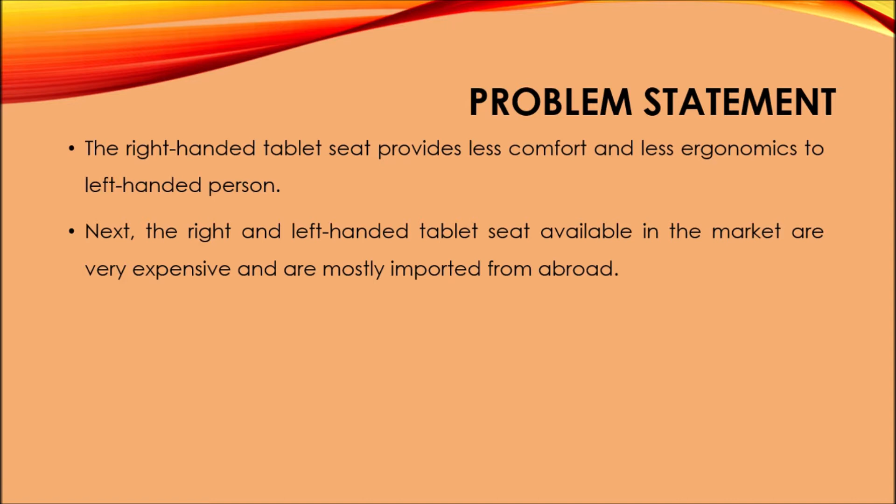Problem statement: the right-handed tablet seat provides less comfort and less ergonomics to the left-handed person. Also, right and left-handed tablet seats available in the market are very expensive because they need to be imported from outside the country. The objective: to produce a tablet armchair that is easily portable, and to fabricate a tablet armchair that enables both left-handed and right-handed persons to use it.

The scope of the project: the focus of the study is to improve the ergonomics of the chair user by producing a both-handed tablet armchair that is comfortable to use, to enable both left-handed and right-handed persons to use the chair, and lastly, to produce a foldable chair that is easy to carry.

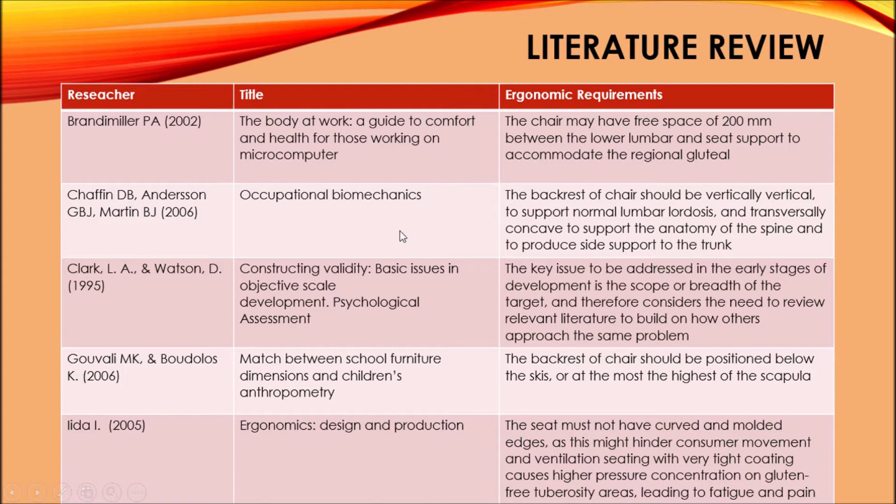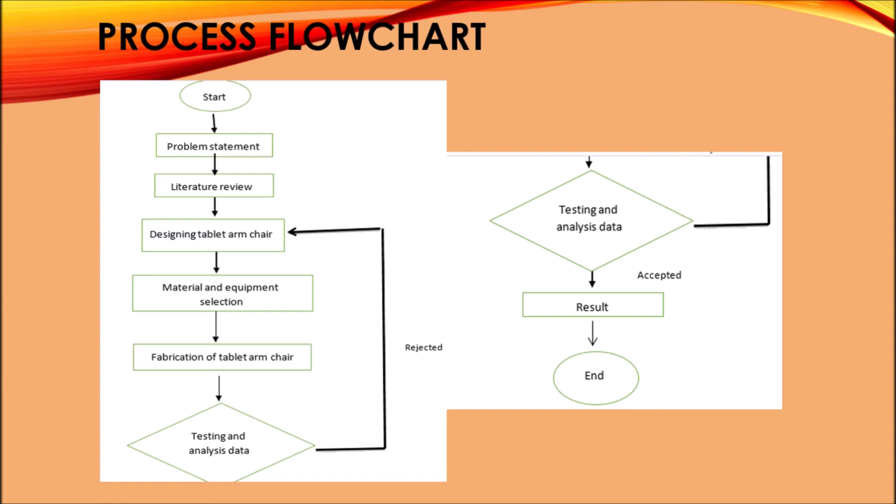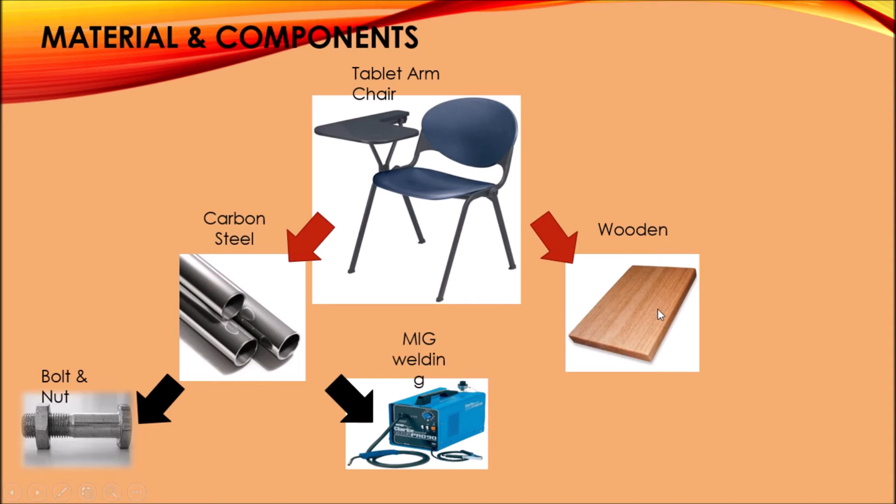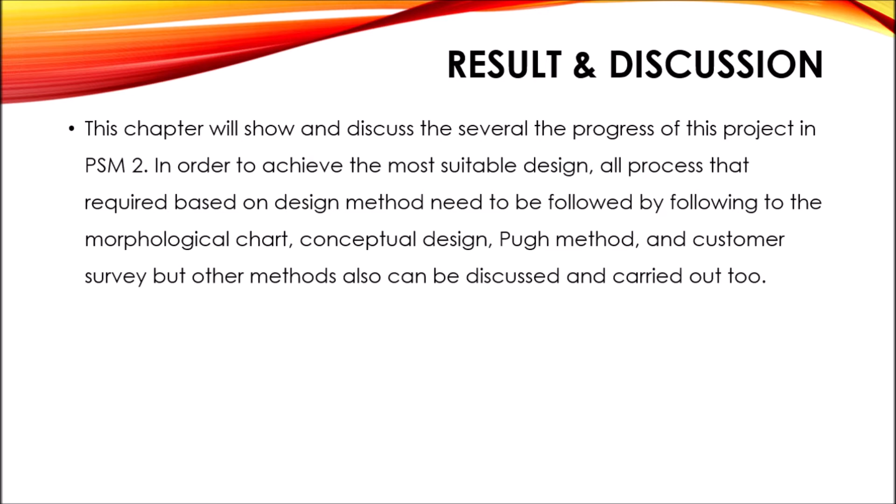We proceed to chapter 4, result and discussion. This chapter will show and discuss the progress of this project in PSM2 in order to achieve the most suitable design or process required, based on the design methods followed, such as the morphological chart, conceptual design, Pugh method, and customer survey. But other methods can also be discussed and carried out.

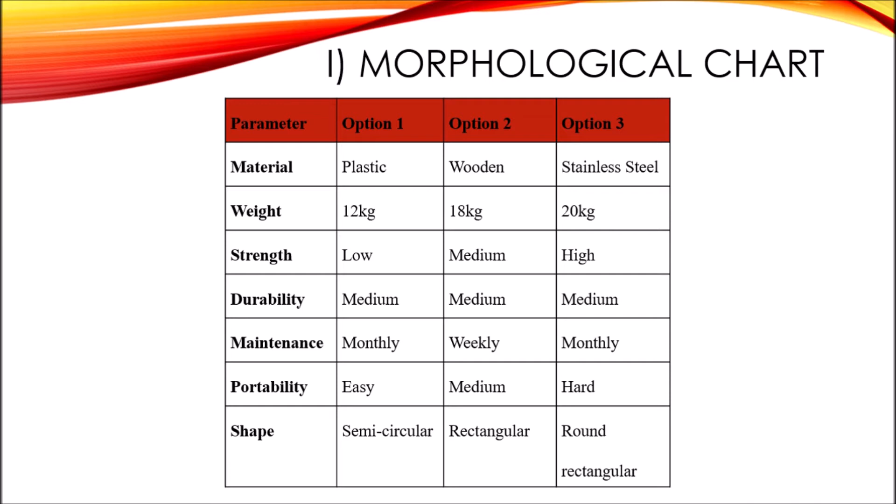Okay, for this morphological chart method, we choose stainless steel because it has high strength, is more durable, and can withstand heavy force.

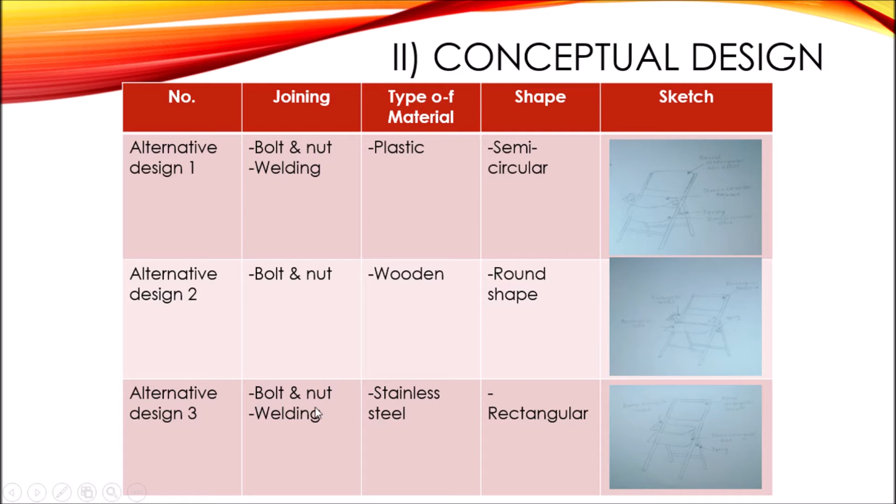Conceptual design: there are three alternative designs. Alternative one, plastic, we use joining by bolt and nut and also welding. For alternative two, the wooden material, we join it using bolt and nut. For alternative design three, we join it using bolt and nut and welding.

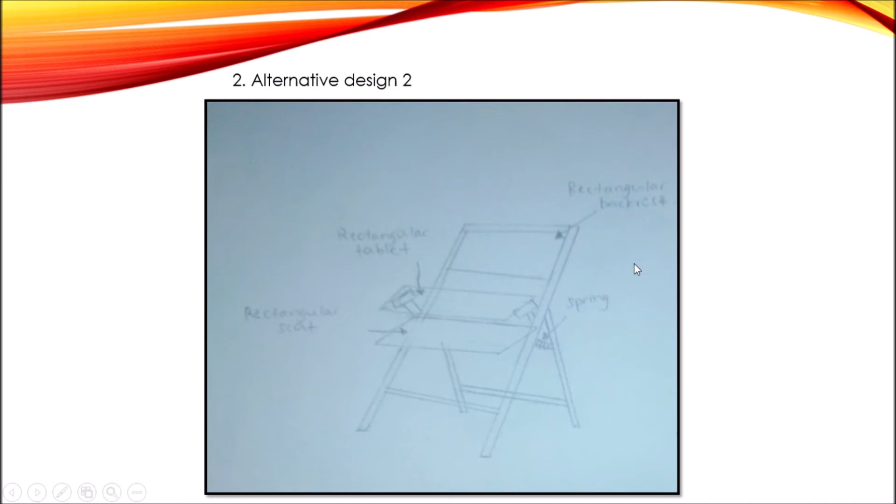This is alternative one, which is the plastic material. Alternative design two, which is the wooden material. Alternative design three, which is the stainless steel material.

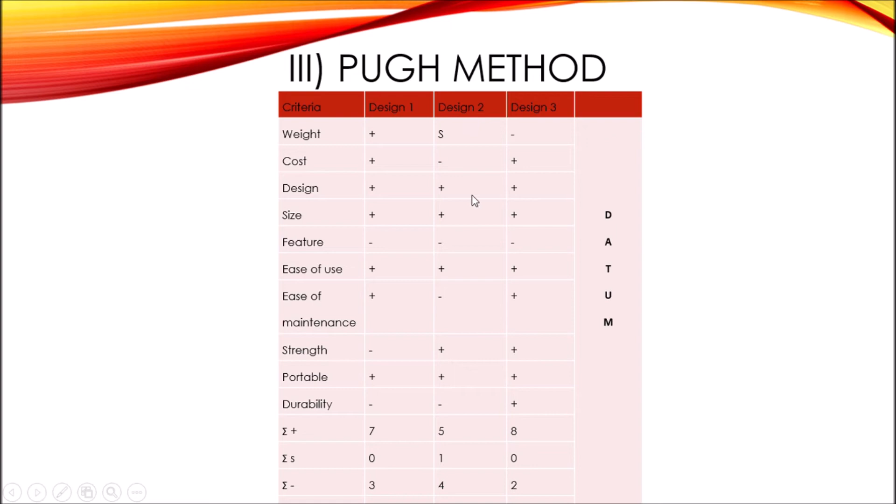Okay, we proceed to the PUGH method. As you can see, this is the result we get for the PUGH method.

Customer survey is a set of questionnaires to gather information about the both-handed tablet armchair product. The importance of the survey is to determine issues faced by customers about the design of the product and potential solutions for the issue.

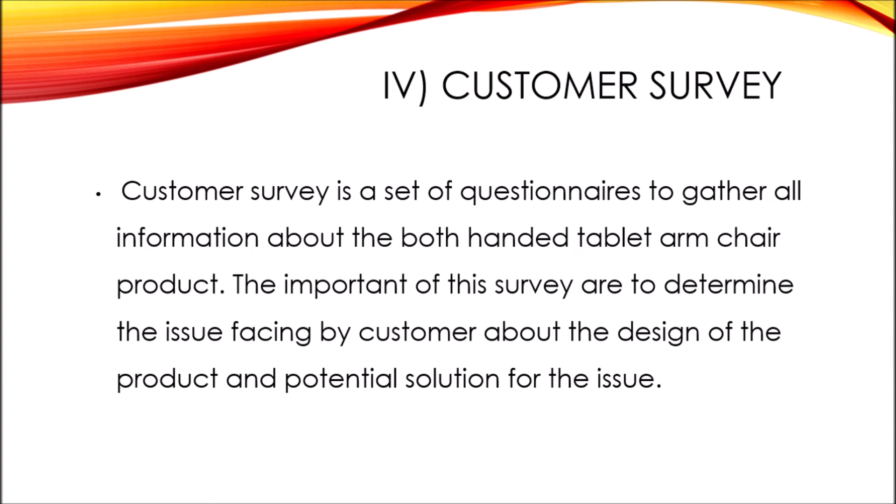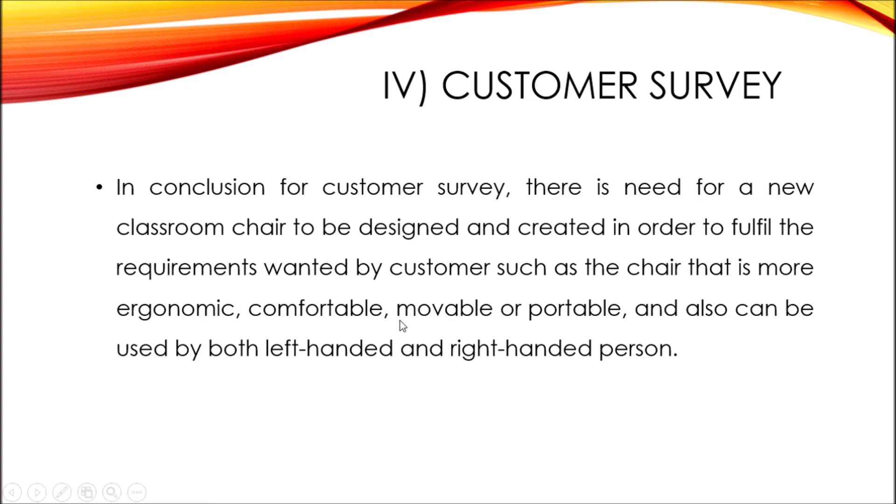In conclusion, for the customer survey, there is a need for a new classroom chair to be designed and created in order to fulfill the requirements wanted by customers, such as a chair that is more ergonomic, comfortable, movable or portable, and also can be used by both left-handed and right-handed persons.

The stress analysis simulation is created to determine the ability and strength of the both-handed tablet armchair to undergo a force of 1200 Newton, or 120 kilogram, on the chair seat, and 200 Newton, or 20 kilogram, on the tablet arm.

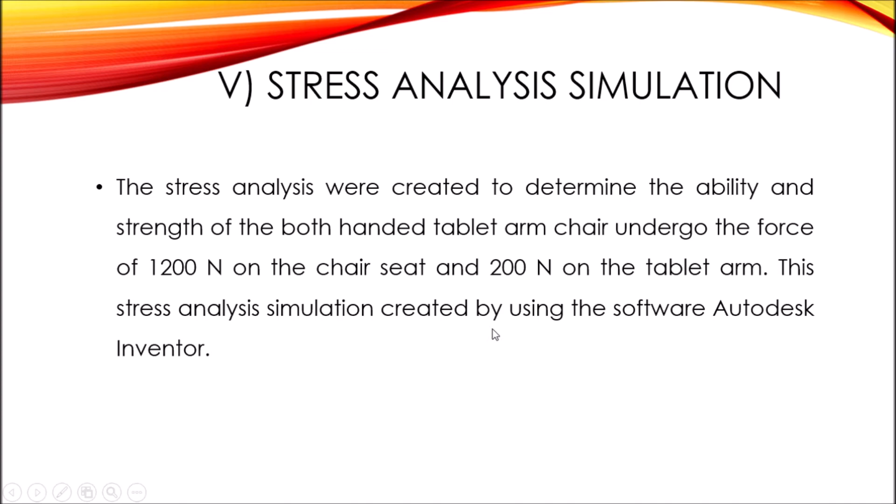This stress analysis simulation was created using the software Autodesk Inventor. So this is the material properties for the stainless steel material and the material properties for the wooden material.

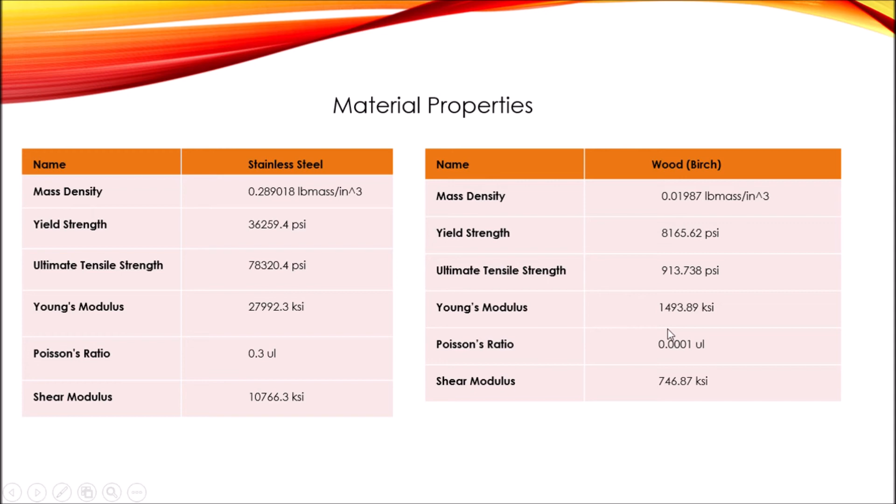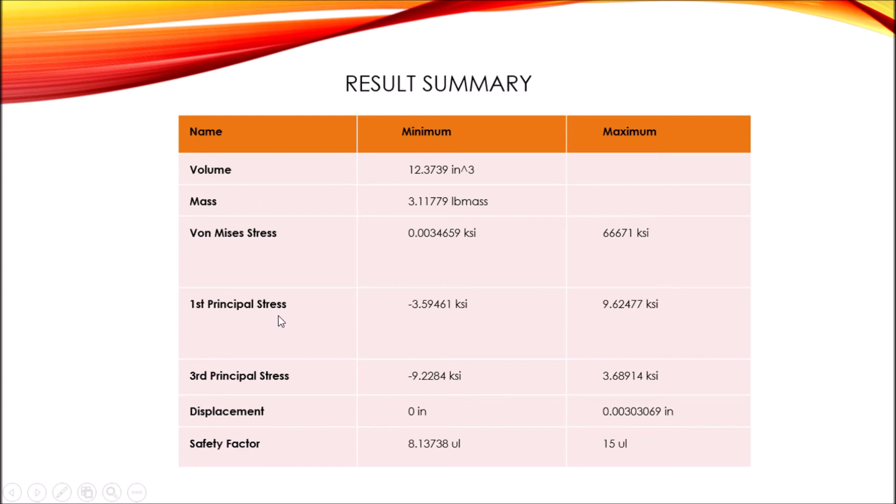So we get the result summary. The result for this analysis is based on von Mises stress, first principal stress, third principal stress, displacement, and safety factor. First is the von Mises stress.

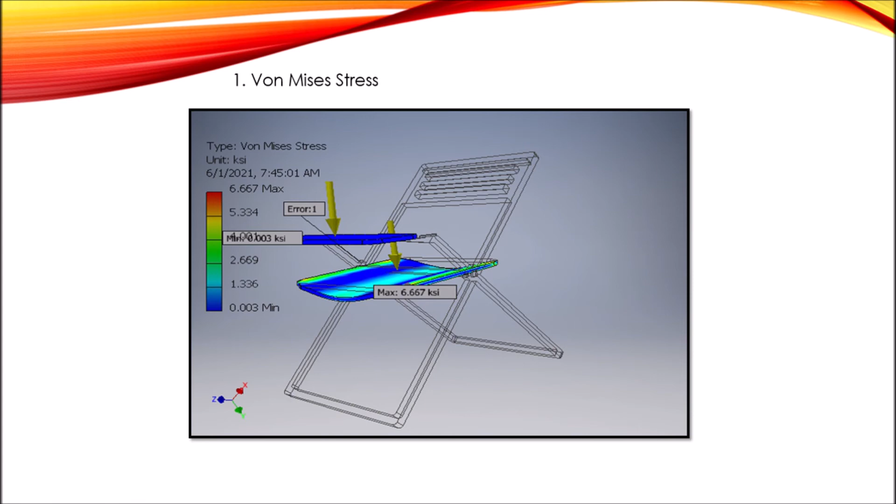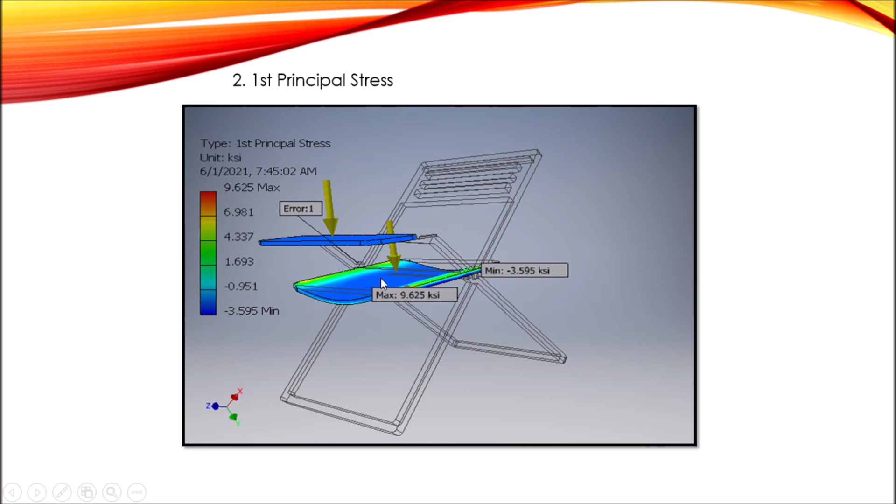First principal stress is used to understand the maximum tensile stress acting on the material. It's looking good because we can see the blue and green color. So the blue and green color means it's looking good.

Third principal stress is used to understand the maximum compressive stress acting on the material. We can see that overall the color is green and blue, so it means good.

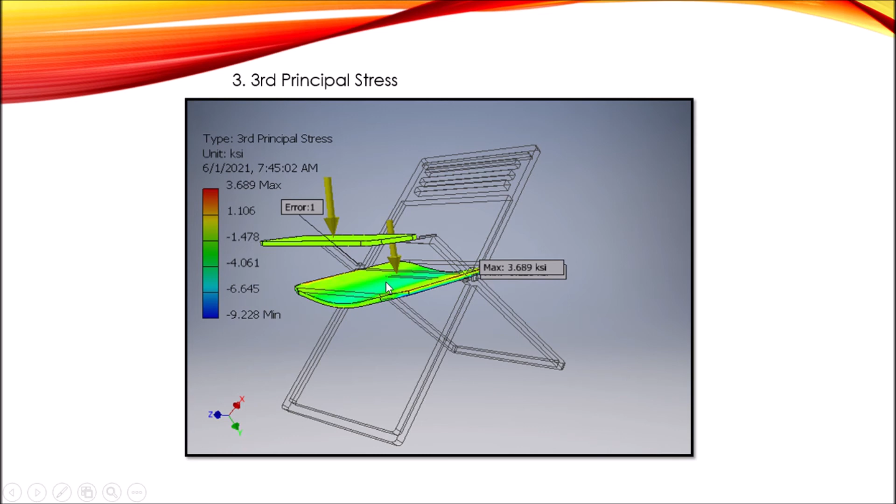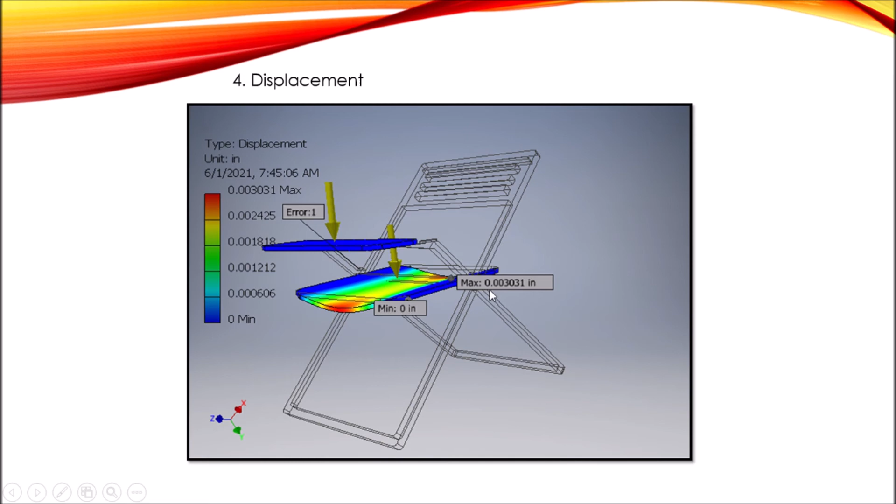Displacement is defined as when a force acts on the material, the material will move by some amount, measured in inches. We can see that the minimum the material will move is 0, and the maximum is 0.003031 inch only.

The safety factor is used to determine whether the material is safe or not. We can see that overall the color is blue, so yes, it is safe to use.

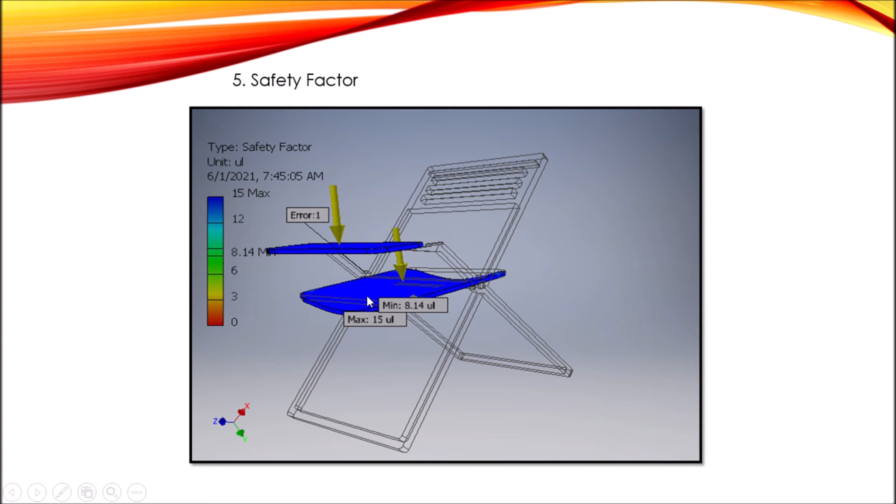Discussion: the chapter carries on with its methods used for the product development. The important design methods are morphological chart, conceptual design, Pugh method, and customer survey, methods functioning to ensure all the choices of the product meet the expectation and objective in a specific way.

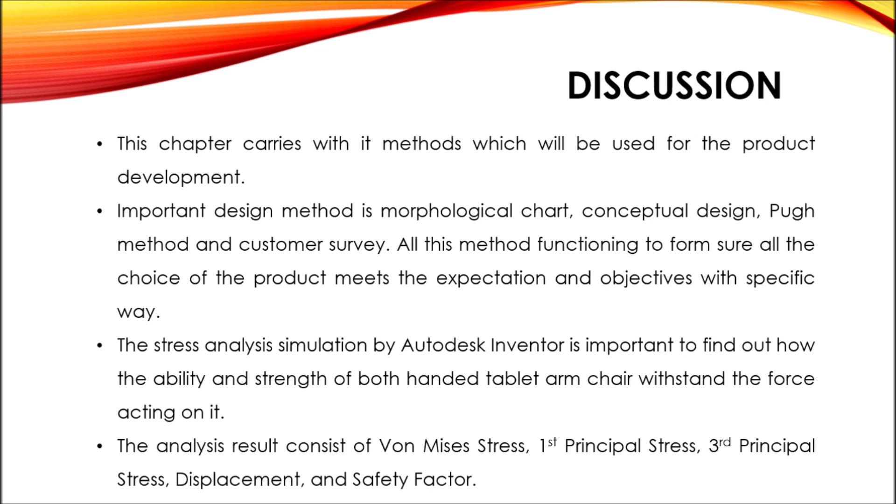The stress analysis simulation by Autodesk Inventor is important to find out the ability and strength of the both-handed tablet armchair to withstand the force acting on it. The analysis result consists of von Mises stress, first principal stress, third principal stress, displacement, and safety factor.

In conclusion, the objective of the project is achieved, which is to produce a tablet armchair that is easy to carry, which is portable, whereas the chair is a foldable design. Next, the objective achieved is to fabricate a tablet armchair that can be used by both right- and left-handed persons, whereas the design of the chair is improved.

In order to acquire the best design, the morphological chart, conceptual design, Pugh method, and customer survey are constructed. It proves that these design processes are important to get the best design tablet armchair. Lastly, the both-handed tablet armchair can be used by right- and left-handed persons, easy to carry, which is portable, and most important, safe to use.